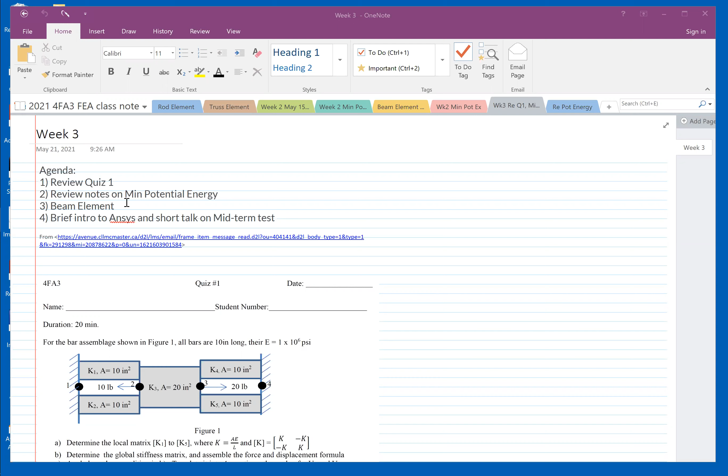Okay, now let's get back to our class. Today's agenda, I have four things I want to talk about. Number one, you guys did well on quiz 1, but I'd like to go through it with you and tell you what I'm looking for when I mark your assignment, quiz, or test. Number two, I want to review, because last week I went through the minimum potential energy notes quickly, so I'd like to briefly go through it one more time. Number three, I'm going to introduce you to a new friend — the beam element, a new element we're going to learn. And number four, I want to briefly introduce you to Ansys, and talk about our plan for the midterm test. That will do.

Okay, now let's work on quiz 1 together. You guys did very well, I marked it, I'm very impressed. The first step, when you see a diagram like this, you may, if you feel comfortable, work on it right away. If not, we draw the whole thing into spring elements.

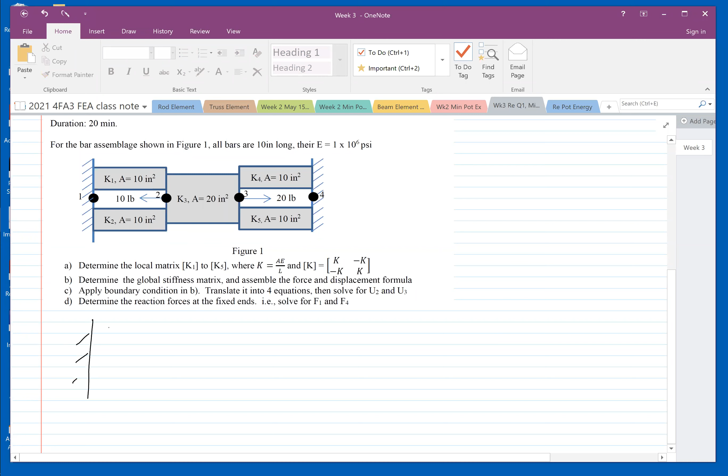Now, and then name them. In this case, there are 5 elements. I am so nice right here — in the quiz, I already labeled the nodes for you, but sometimes I don't do it. It's the first quiz, so it's kind of a given, but usually you have to name your own nodes.

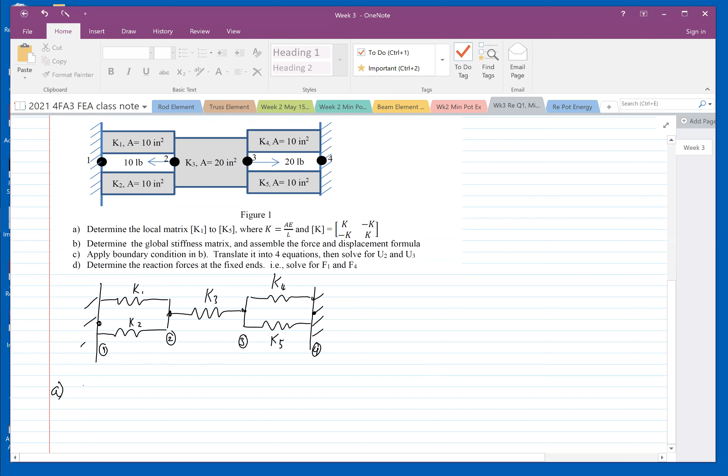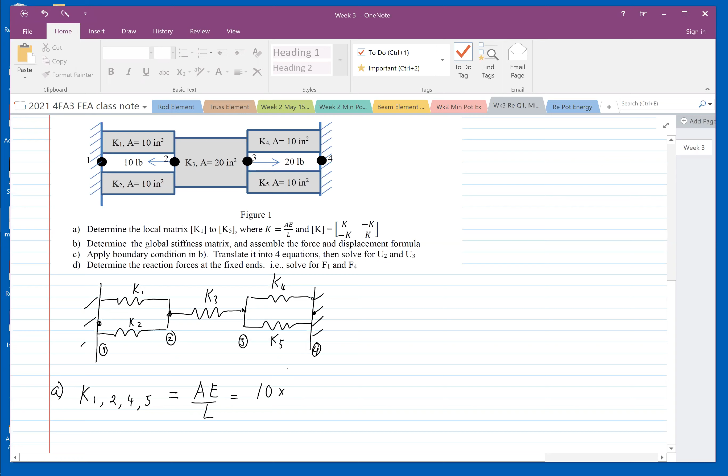Now, let's find the local matrix. In this case, K1, 2, 4, 5 are the same: 1, 2, 4, 5, which is AE over L. 10 inches squared times E — what is E in this case? 1E6. Okay, double check: all units are the same. This is inches squared, this is PSI, perfect, I don't need to convert anything.

Length, which is 10 inches long, so we cross out each other. So K1, 2, 4, 5 is 1E6 times [1, negative 1, negative 1, 1]. That's the local matrix.

If you feel comfortable putting it into the global matrix right away, that's good. But in my question, I asked for the local matrix, so you must specify that. Sometimes I do, sometimes I don't — it depends on the question.

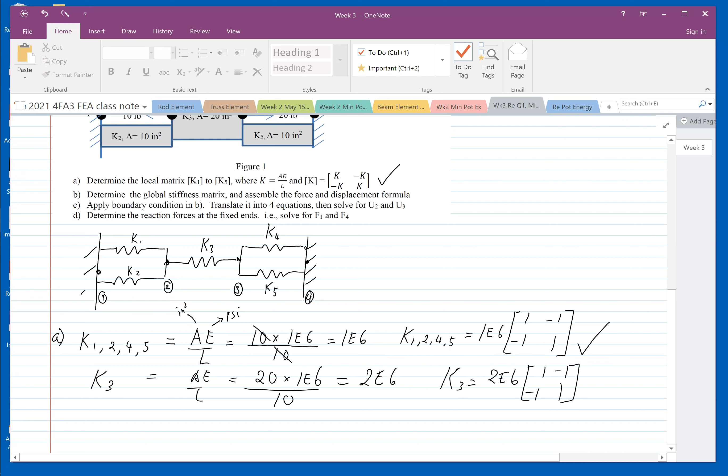For K5, sorry K3 — K3 is AE over L, which is 20 times 1E6 over 10, equals 2E6. K3 is 2E6. By the way, this is how I prefer to write it because it's faster. This is equivalent, up to you how you do it, as long as I understand it and you can present your data, it's all good.

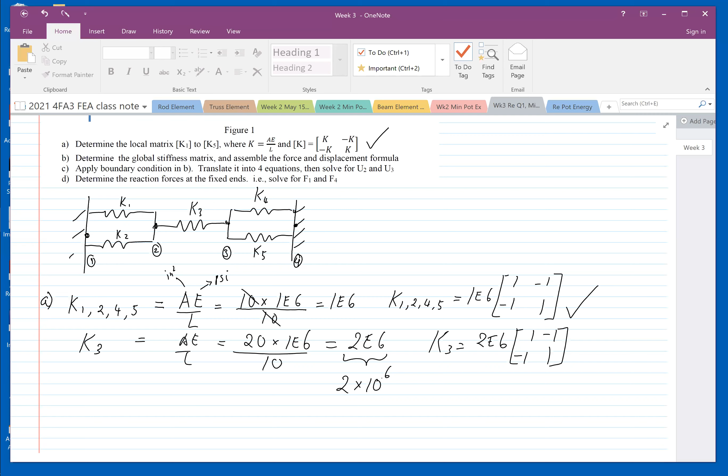The next step, we need to assemble them globally into the global matrix. So whenever they share the same node, whenever they have the same degrees of freedom, you can merge them together.

I like to factor it out. Okay, so I can say 1 times 10 to the 6 right here. Okay, and then this is...

Let's look after K1 and K2 as well. It will be 1 plus 1, minus 1, minus 1, 1 plus 1, minus 1, minus 1. Okay, so this part is done. All right, then look after the second portion of it, which is K3, which is 2.

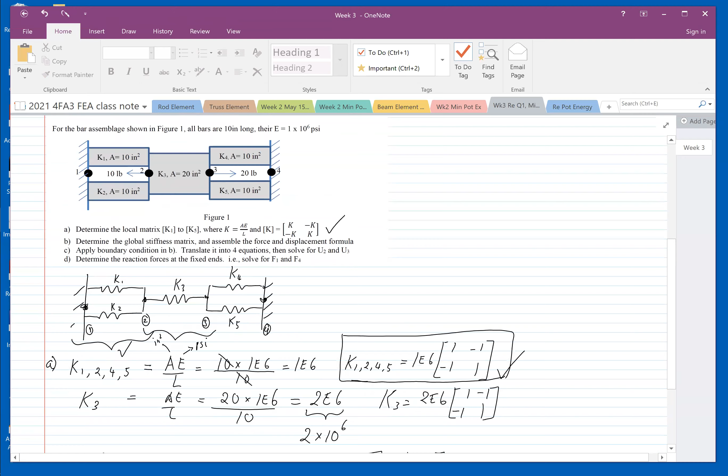On the left side, F2 is 10 pounds to the left. F3 is 20 pounds to the right. Okay, F2 is, because it's to the left, so it's negative 10. F3 is 20.

Okay, if you have that, you already get like 80% of the mark. I count every single step. If you just give me the answer right away, you won't get much. But I count the steps. I want to see how you think, how you process the problem.

The rest of it is very easy. You just multiply this part. What do you get? Okay, you got two equations.

U2 times 4. I think it's 4. Yeah, that's right. Minus 2U3. Did I do it right? I think so, yes.

Back to the comments to one of the students: pay attention to every single detail. Because when you're building something, building a bridge, building cars, if you miscalculate something, you might kill some people.

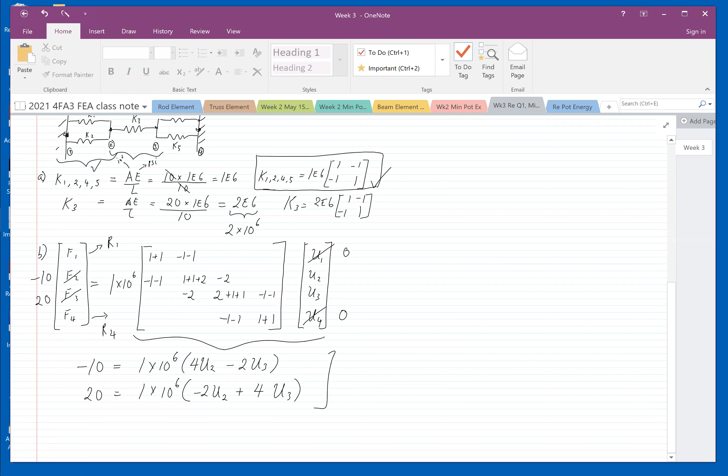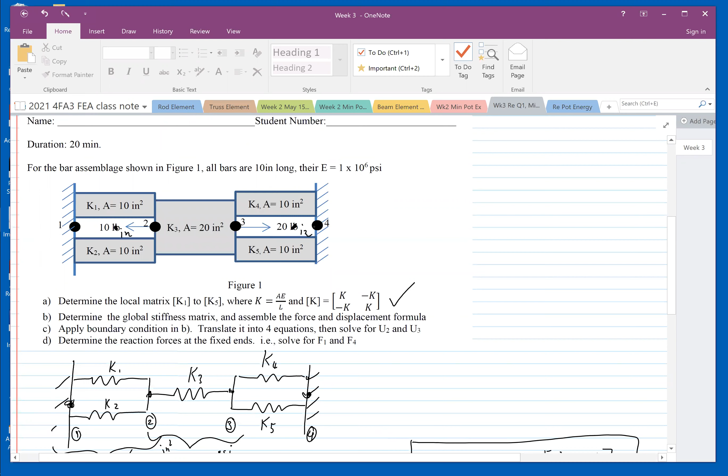Sometimes, instead of 10 pounds, let's say I'm given 10 inch, and right here is 20 inch. Okay, so I do not apply boundary condition on force anymore. I'll be applying negative 10 inch. Is that good? Sometimes you're allowed to do so.

On your left, you always apply boundary condition on forces. On the right, you can apply boundary condition on displacement, inches. Did I answer your question?

Yeah, I would say, but I was just thinking about it, let's say if we go to that spring element diagram, if you move the page up a little bit. Yeah, and so in the examples we did in class, the forces were going all in one direction, so the U's were also going all in one direction. Now, let's say the force 10 pound is going to the left. Does that mean U2 is also going to the left in this case?

Just thinking. I let the equations decide for me. I don't know if U2 is moving left or right yet. I put in the boundary conditions, and I let it decide for me. When U2 is negative, then you move to the left. If it's positive, you move to the right.

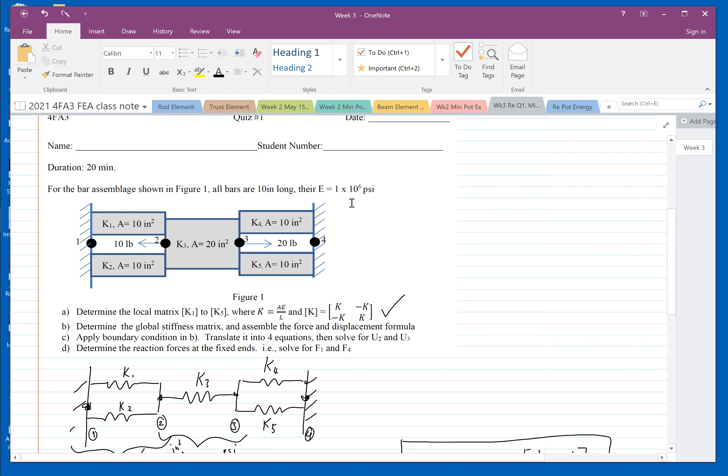All right, it makes sense. Okay. Okay. Yeah.

Okay, I'd like to quickly go through the minimum potential energy approach lecture again. Won't be long.

So we start with a 1D element. It has two nodes: node 1 and node 2.

What's going on with the node? Each node, you're allowed to apply a force to it, along one dimension. You can move in both directions along that one dimension, left or right.

Same here on node 2. You have a force, and you're allowed to move as well.

So this element, each node has 1 degree of freedom because it can move left or right. But the element has 2 degrees of freedom, DOF.

I know what's going on at the node, but what is going on in between? I need a shape function to decide for me. So I put everything in terms of u as a function of x. x can range from 0 to L.

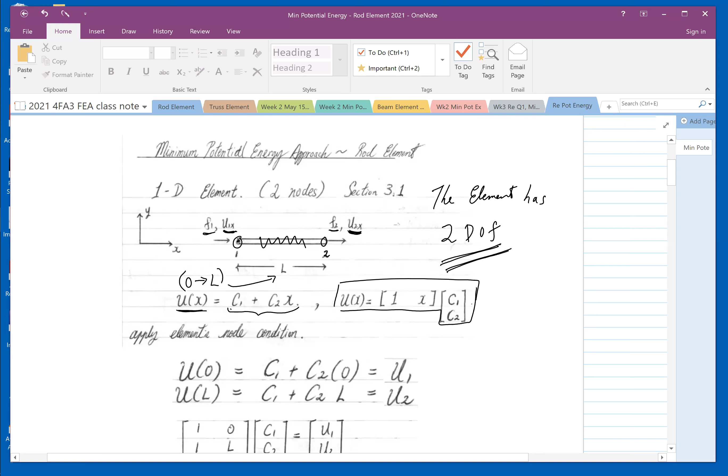So far, I just assume 2 constants. Now I apply the node condition. When x is 0, I know it's moving U1, because this is something that I know. I know node 1 is moving U1, node 2 is moving U2. So I apply that: C1 plus C2 times 0 equals U1.

And then when x is L, I know it's moving U2. So again, I apply the same thing here. We get U2.

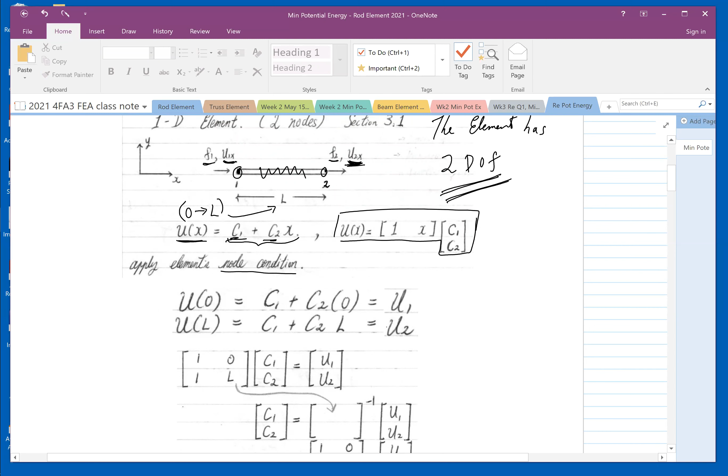Factor out C1 - that's something we're looking for. Then I inverse the whole matrix, the whole mess, and I get this.

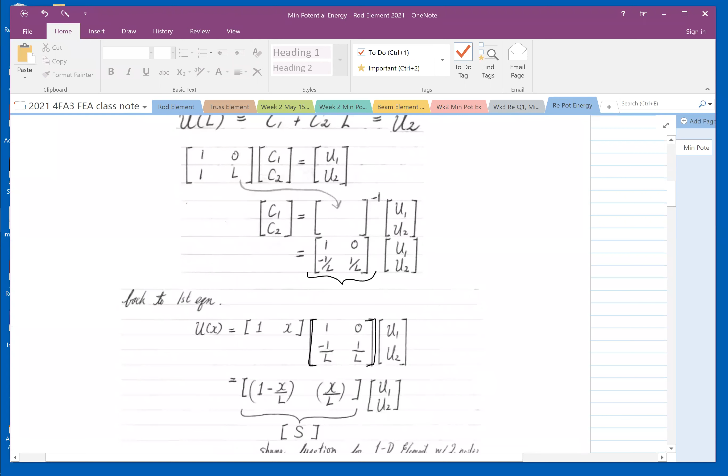Basically, this is the shape function, which is 1 and x times... this is C1, C2.

All right, put this aside. We want to study the elastic behavior within the elements - the work done to deform under force. The work done within an element is force times the total displacement.

But right here, my intention is to put everything in terms of the strain. I start with the work done, and then I take the integration of it, putting everything in terms of strain energy.

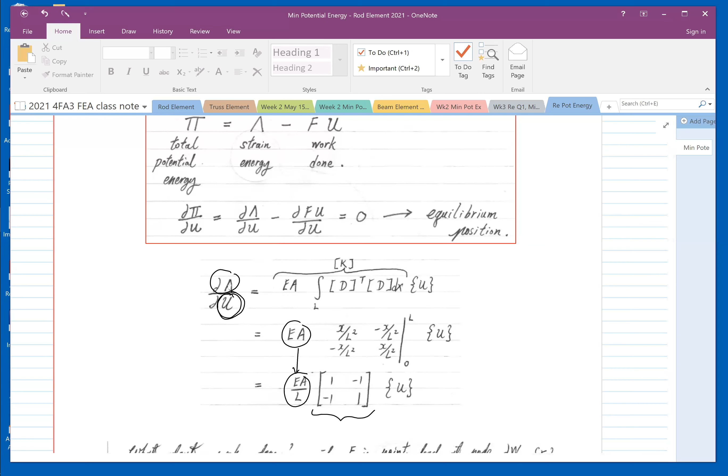It is not easy to understand all the steps and details, because seriously, a project like this is worth like a PhD degree. It takes many years to develop, but we are the lucky ones - someone developed it for us, we just use it.

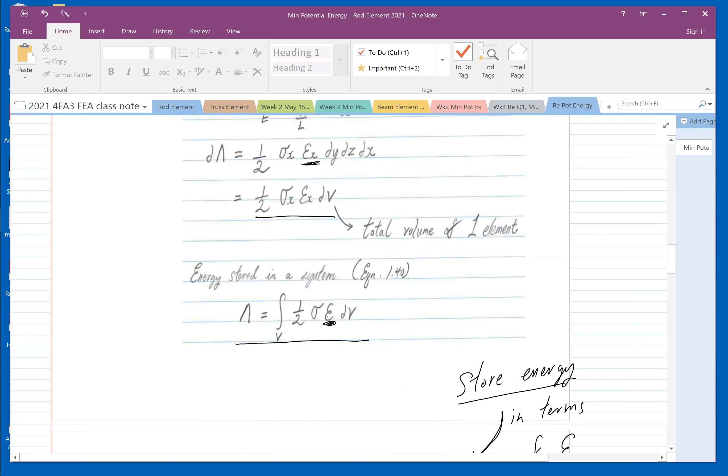But the major concept is like this: you start with elements, you develop that into a shape function. From the behavior and the energy equations, you put everything in terms of strain. And with the strain, you develop a strain and displacement relationship, the matrix.

You put it into the equations, you take the derivative of this, and factor out EA over L. You get the stiffness matrix of the elements.

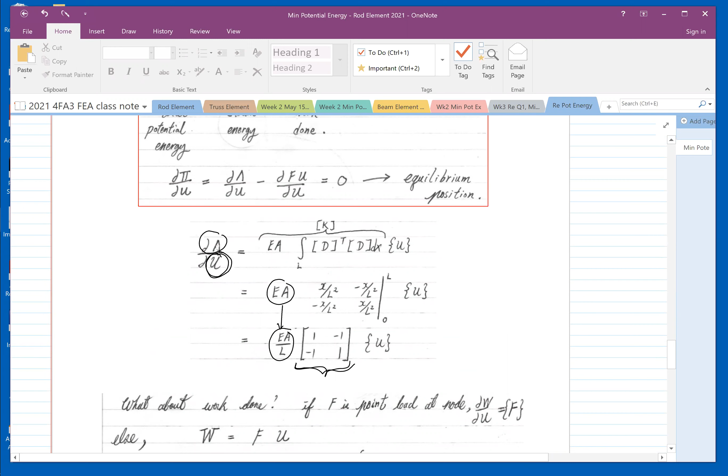And the work done on that assembly can be calculated by integrating Fx and Ux. Okay, because Ux is a variable, right?

And then the shape function of that - which is the shape function. The variable, okay, sorry, the variable u is the shape function times the u vector that you know.

Oh, by the way, I think I said something wrong. I previously said u is not a constant. It is a constant - it is u1 and u2.

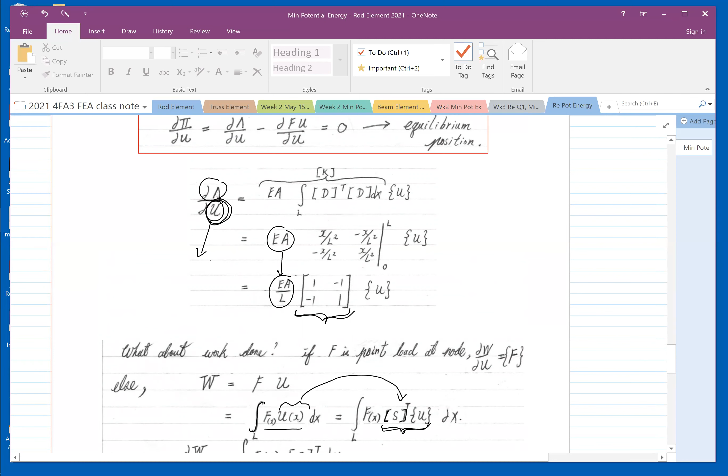Known values that we define in the first step: how much they move, u1 and u2. Anything along the axis is variable, but u1 and u2 alone is something that we know.

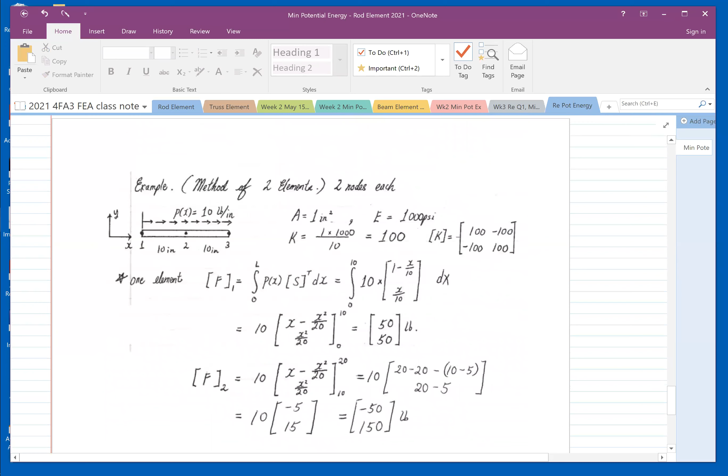And from the examples, we don't need to develop the stiffness matrix anymore, we just use it. We know the stiffness matrix is k, negative k, negative k. But we only have to define the force, which is the applied force, 10 pounds per inch, times the shape function.

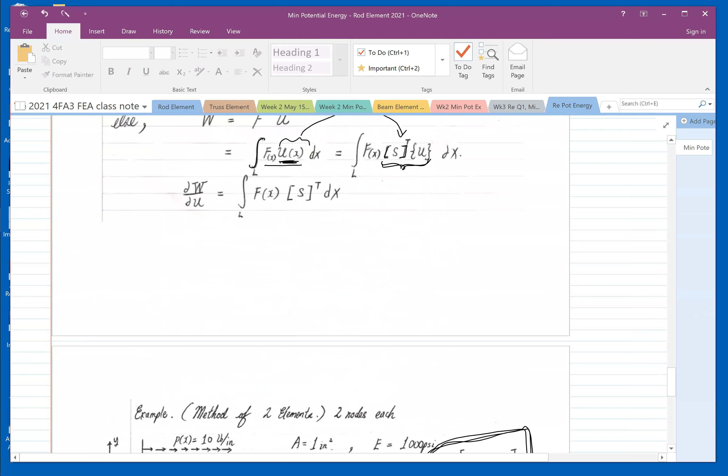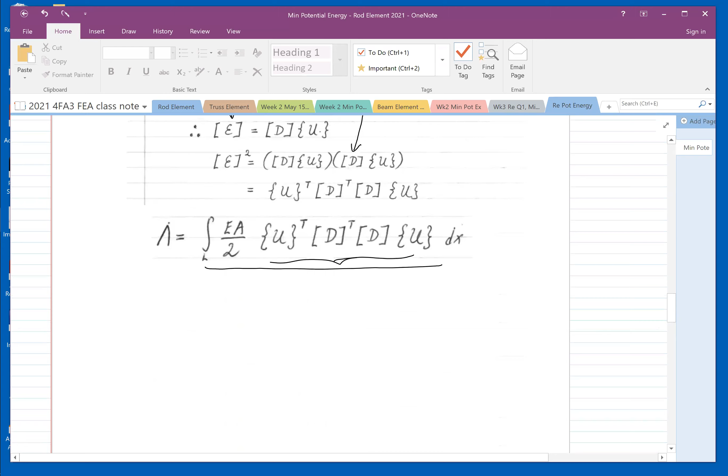And the shape function of the elements we know, we learned it previously. Each element has this unique type of shape function. For that shape function, you can only use it in a 1D with 2 node elements. Do not use this shape function for some other elements, you cannot. Each element has this unique shape function signature.

So it is a 1D with 2 node elements. So we use the shape function and take the equation of that. We get the force on the 2 nodal points. For F2, this is the second portion of it. And then we take the shape function of it and integrate that. We get another force. We put those 2 forces together.

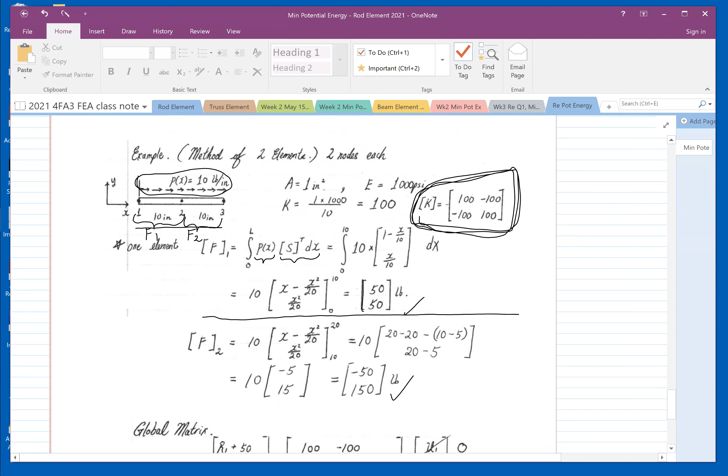So F1 and F2, are they work done? They are, F1 is the local force matrix, let's call that local force matrix. F2, that applied force is gonna do something to the elements, right? The applied force is doing something along the elements, but what are they? With this expression, we can calculate what this force is doing to the elements on both nodes.

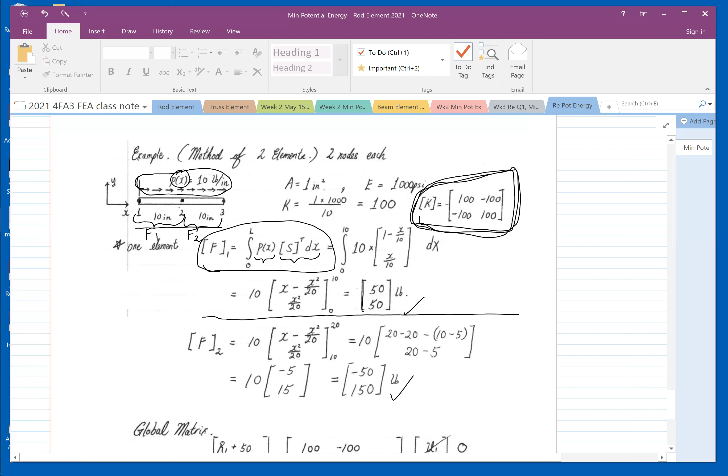So this is the local, what happened locally in a matrix, right? Locally on each element. When we combine them together, we get this.

And then we apply the boundary conditions. We get U2, U3, and then the reaction force along the wall.

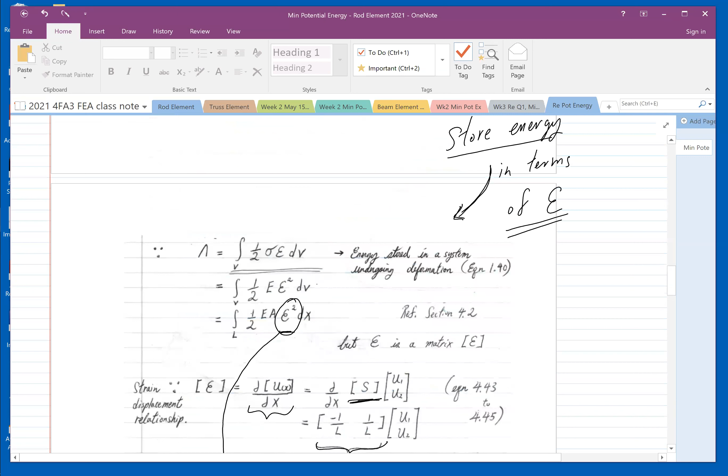Always. For more complex ones, it's going to be different though, right? The more complex one is the strain displacement matrix, is that right? In this case we don't need it, because I already know how to calculate the stiffness matrix for the spring element. I don't need to go through the spring elements matrix and calculate the energy again because I know the spring elements matrix will be like this, right? So I don't need to calculate it one more time.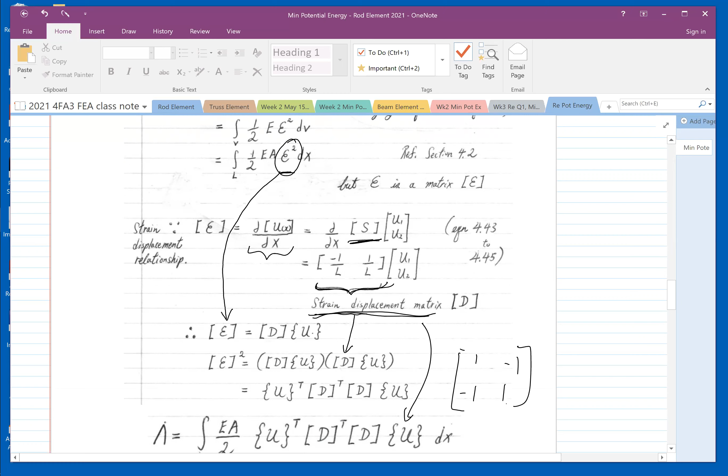So I just use the shape function, which is 1 minus x over L, the shape function. So this is for two nodes, right? So if we have three, if we're gonna do a shape function for 3 nodes, it's gonna be different, right?

Very different, very different, okay. But like you showed here, we don't need to do it for a complete 3, right? We can divide it into 2 and then combine it. It's a lot easier, isn't it? Yeah, right, yeah yeah, I know.

Did I show you examples? Yeah, I saw that in a textbook. You assume ux and then what, c1 plus c2x plus c3x squared, something like that, right? I saw that in a textbook, but I don't want to use that, this just takes way too long. Well, if I have an element with 3 nodes, why not join 2 elements with 2 nodes in it?

So it works with any number of elements, right? Say we have another point at 0.4 also, so we can divide it into 3 different elements with 2 nodes. Yes, you can do that. Yeah, okay. With only one condition though, they must have a common degrees of freedom. You understand what I mean by that?

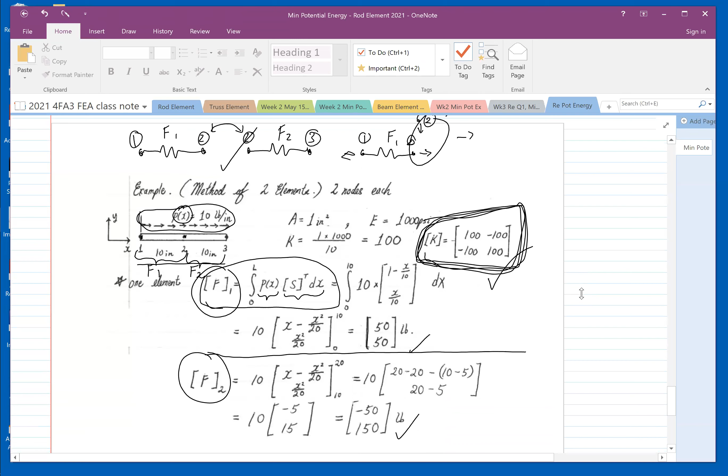Let's work on a new element. Sorry sir, I have a quick question about the global matrix, where you develop 50 plus R and 50 minus 50. Can you explain how you get that? Oh, no problem, let me show you with the example.

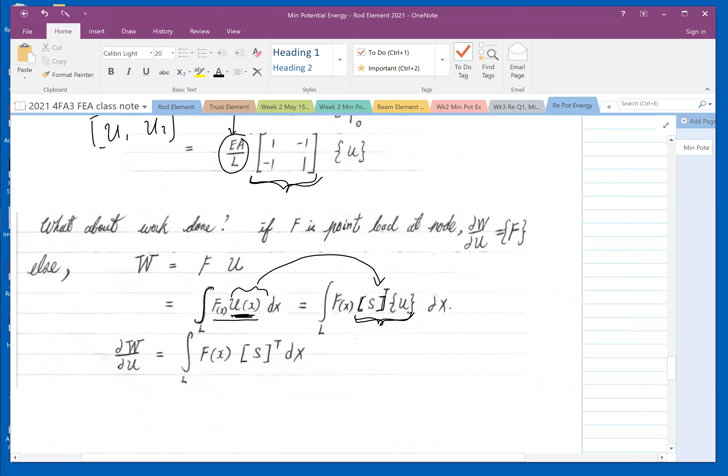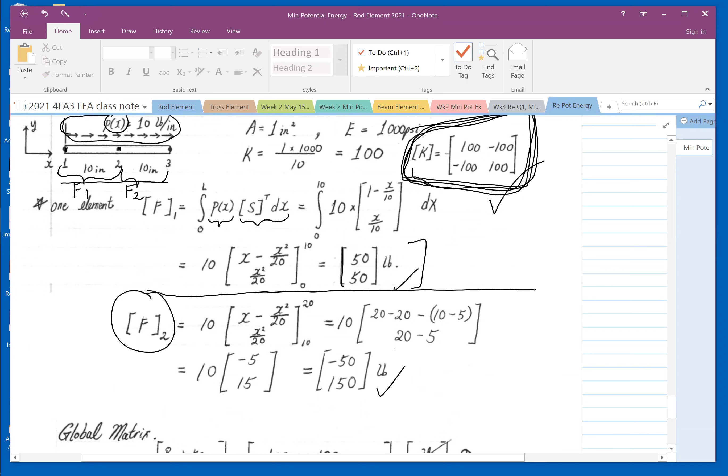You talk about the force matrix, right? Do you have a problem? Do you understand the integration? Yes. You have the integrations, right? And do you understand this part? Yeah. Then that's very easy, I'll show you.

Okay, is that good? Can I move on? Yes, thank you sir. No problem.

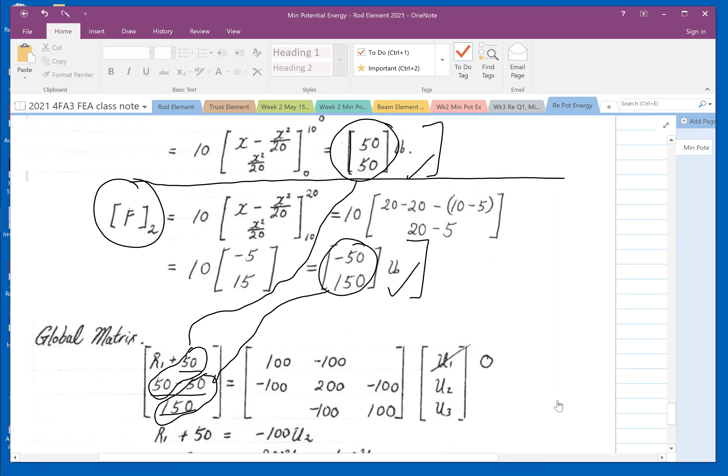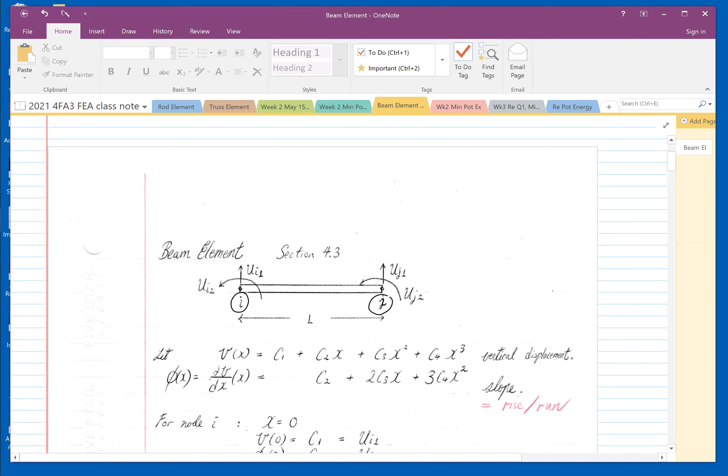Okay, today I'd like to introduce a new element to you. That element also has two nodes, node I and node J. However, it behaves something very different. Each node, they can move up and down, and also it can turn.

It's allowed to turn. So that's why the element has 4 degrees of freedom, it has 4 ways to move. So because it has 4 degrees of freedom, we introduce 4 terms to it.

C1, 2, 3, 4. To define how much it turns, we can specify the degrees, the radian, but there's another way to do it.

We define the slope by using the rise over run. So we take, if the deflection perpendicular to the beam is small enough, we can take a derivative of that previous term. So you get this, this is the term with the slope.

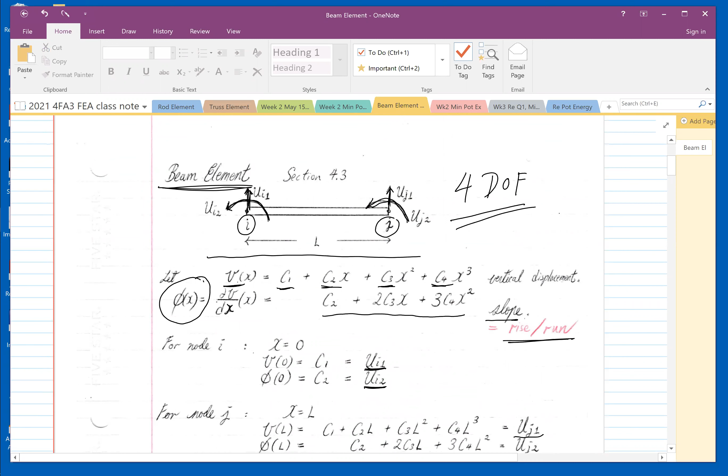Yeah, it's a V. The actual displacement is U. Hey, good comments though, maybe I should change that in the future. Okay, in this case, the function is V, the actual displacement is U. Good feedback, I might change that in the future. But in the meantime, let's assume the function is V. The actual information we know, UI1 and UI2, UJ1 and UJ2, is U.

One more question: does that small v represent the velocity? No, it's not. The displacement, the actual displacement, only the displacement on the node.

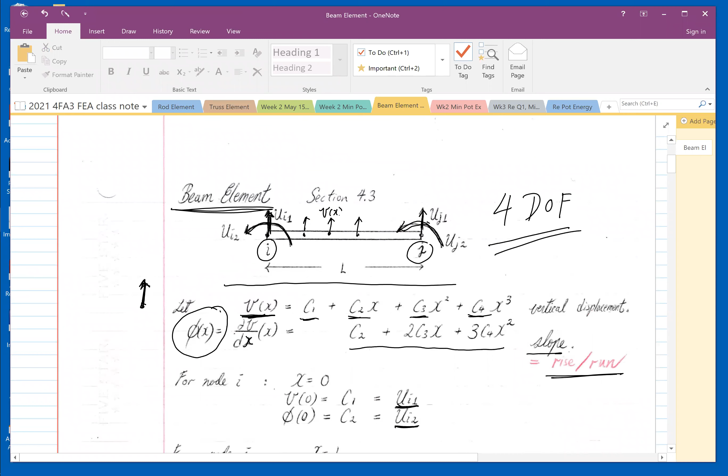What it does is we know what's going on in the node. But what about something in between? That's the V function - how much they move along the L. X is from 0 to L.

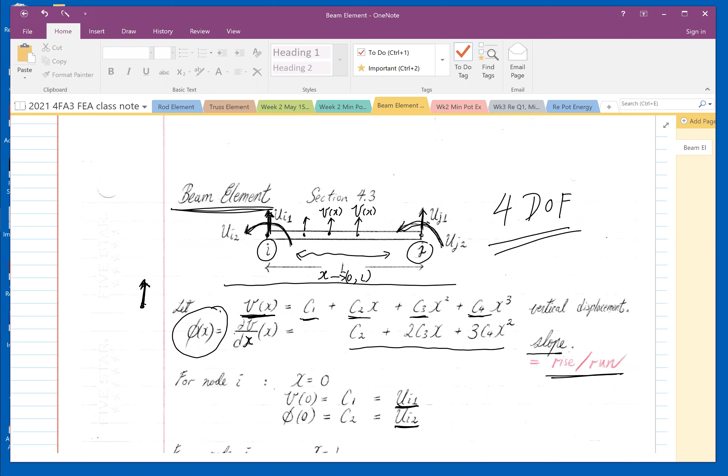Questions, comments? All good? Okay, I'm going to move on now.

Now, for node I, X is 0. So we put all the X to 0 and you got C1 and C2. So right here, we know UI1 will be C1 and UI2 will be C2.

For this example, why do you choose to use 4 C constants? Why is 4 the magic number here? 4 degrees of freedom? Is that what we're looking at? Exactly, 4 degrees of freedom, 4 terms.

Previously, the spring element has 2 degrees of freedom, so C1 plus C2 X - 2 terms. Very good question, very good feedback. I like that. 2 degrees of freedom, 2 terms; 4 degrees of freedom, 4 terms.

Just want to let you know, in the future you can learn 2D elements, which have 6 degrees of freedom, and guess what, 6 terms. That lecture is a mess, but you must understand what we have so far. We must understand spring elements, we know beam elements, then I'll introduce more complicated elements to you in the future.

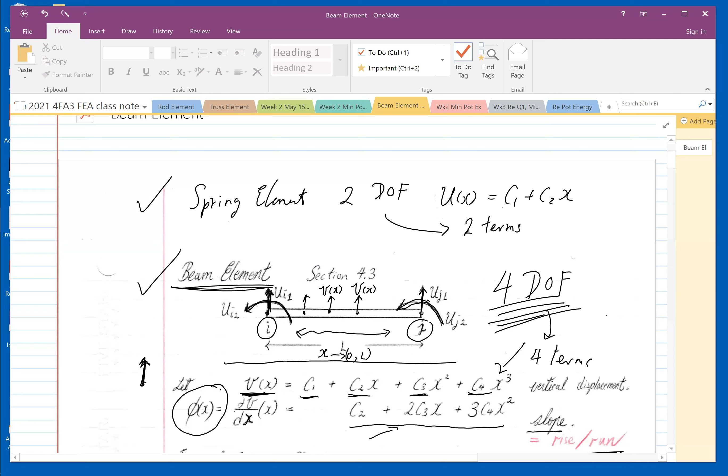Okay, let's move on.

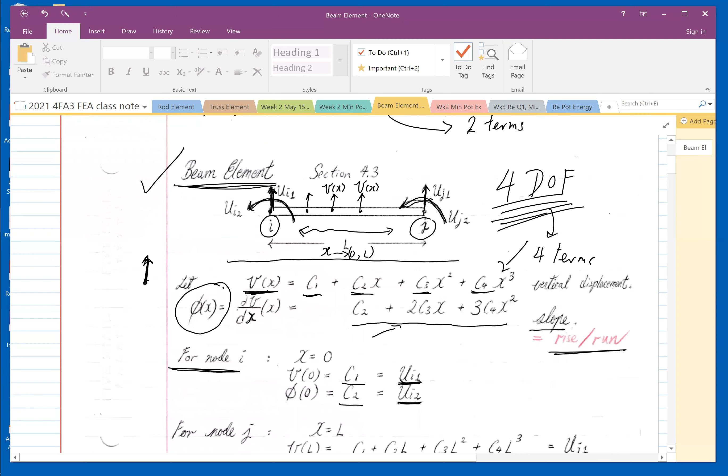Okay, for node I, X is 0. For node J, X is L. So we substitute X equal to L into these equations. And when X is L, we know UJ - at the end of it is UJ1, and the slope is UJ2.

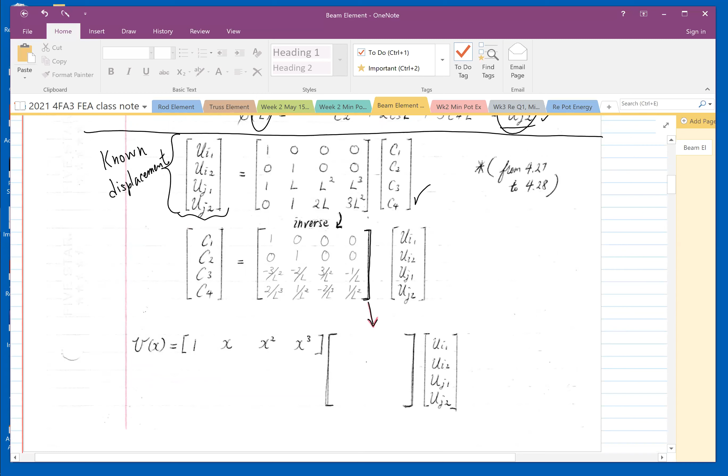We take the inverse of that, which takes me so long, but I did that for you. We put that inverse matrix here, and we multiply that together.

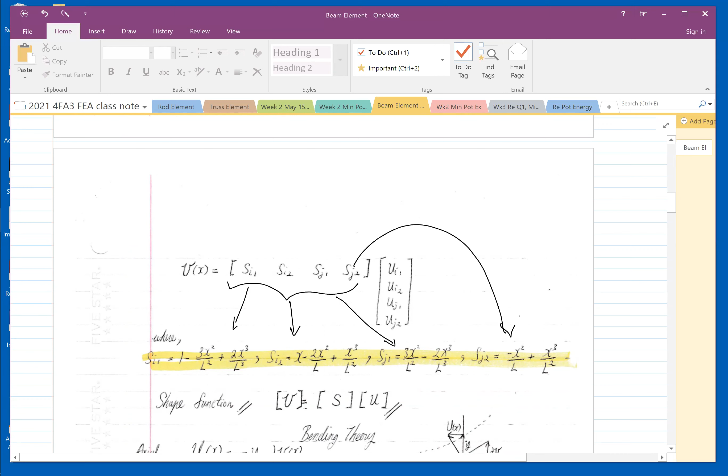Multiplied it together, we get the 4 shape function terms. This shape function term is so long, so I write it separately: SI1, SI2, SJ1, and SJ2. Remember, this is the unique shape function for beam elements only - this shape function will not work in other elements, only for beam elements.

Okay, let's move on.

Bending theory - let's talk about bending theory right here. When this is a beam, when you bend it a bit, there will be small changes to this axial length. That makes sense, right? Because this is the original shape, when you bend the beam, it's a bit shorter, right?

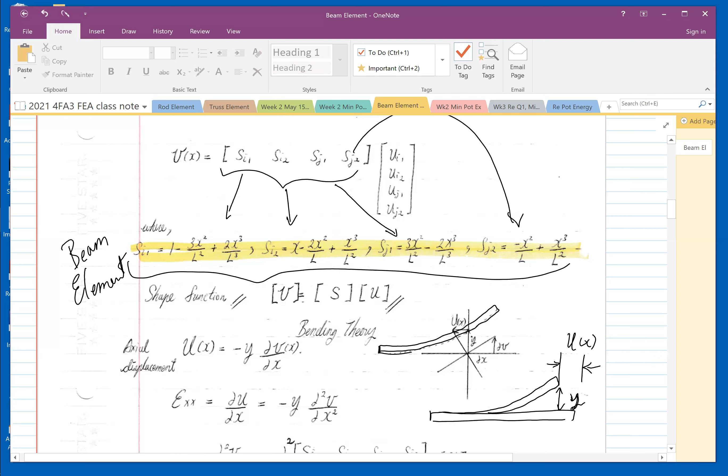So let's define that by Ux. And from the bending theory, depends on how much you bend by Y. And then you can develop that bending theory, so we have that dV function.

Again, the main thing right here - why did I do this? What's wrong with me? I was writing the shape function, and all of a sudden I talk about bending theory. Because I want this term, the strain energy - strain is so important in terms of energy. We move it, we move by a certain length, and then the energy will be stored in between. And that's why we need this term, the strain, which is du over dx, the total length, dx. We take the derivative of that, and when we apply bending theory, we put this term and take the derivative one more time.

Since previously we have a function for v, we simply take the shape function and take the derivative of it twice, two times.

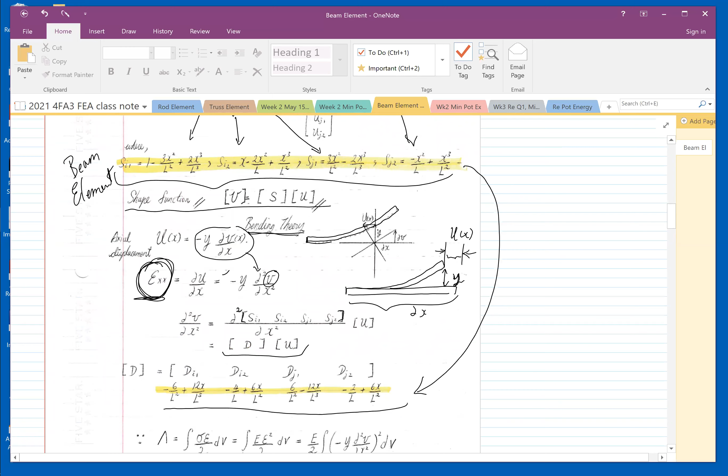The shape function we have, we'll take the derivative twice. Okay, we get 4 terms. Same recipe: we use the strain energy stored within the elements. Can we substitute? See the key components right here, it's strain. Okay.

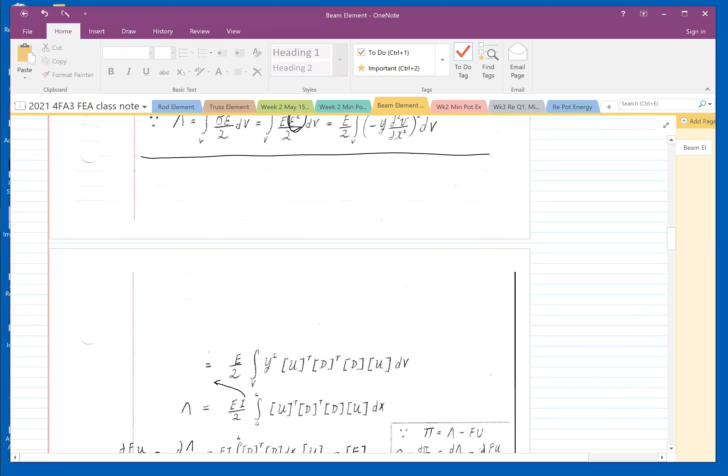We know E. I is the moment of inertia. Again, it's given, it's constant, it doesn't change along the beam. And we factor out this term.

This is going to be the stiffness matrix for a beam element. By the way, D is a 1x4 vector. For D transpose times D, you will get a 4x4 matrix.

It's so long we have to repeat that. Let's do one entry. This is the first term from the D vector right here. Okay, that's the first term. This times this together, we take the integration of that, apply the boundary condition from L to 0, we get 12 over L cubed.

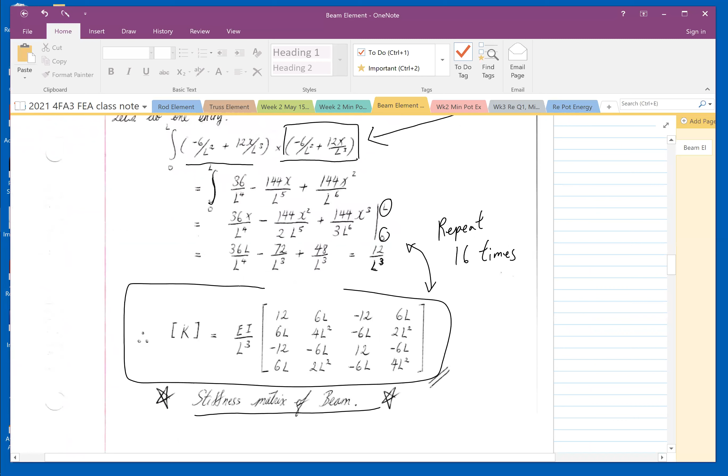The condition is this matrix only works for one beam, okay, with two nodes. It moves up and down, doesn't move... the elements, the nodes move up and down. It doesn't move left or right, okay, it cannot do that. Only up and down, and it turns.

Just to recap, this is a 4 degrees of freedom beam element. Okay, this is the stiffness matrix for the beam elements.

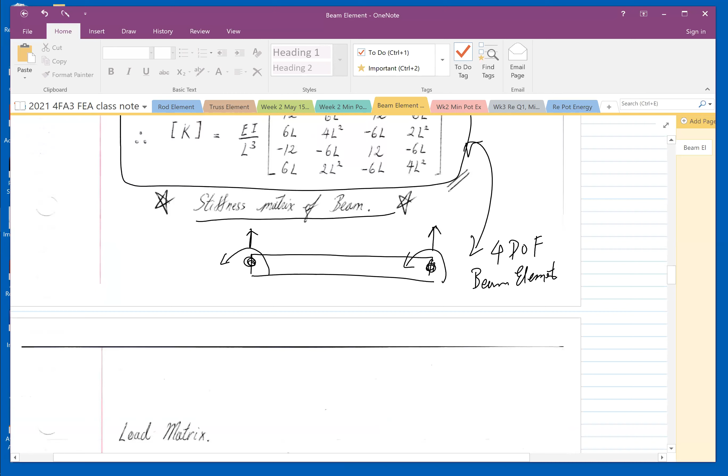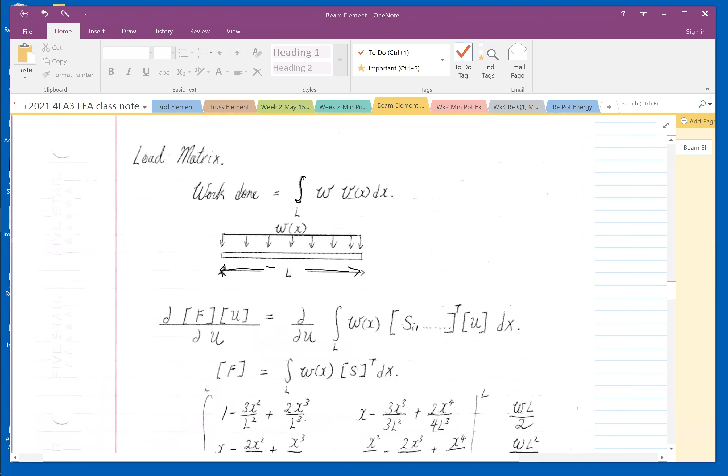But what about the loading vector? Let's say work is being done on the beam elements. Okay, we apply the same recipe, dF over U. We had that in the previous lecture. Okay, the work done, this is the shape function, and this is U that we know.

Known displacement. We have the shape function, we transpose it, and then we take the integration of that. Finally, we apply this from L to 0, and we get 4 terms.

Okay, this is the uniform load applied on the beam.

So for all the talk I had, we developed the stiffness matrix for the beam elements and the loading vector, when there's a uniform load on top of the beam.

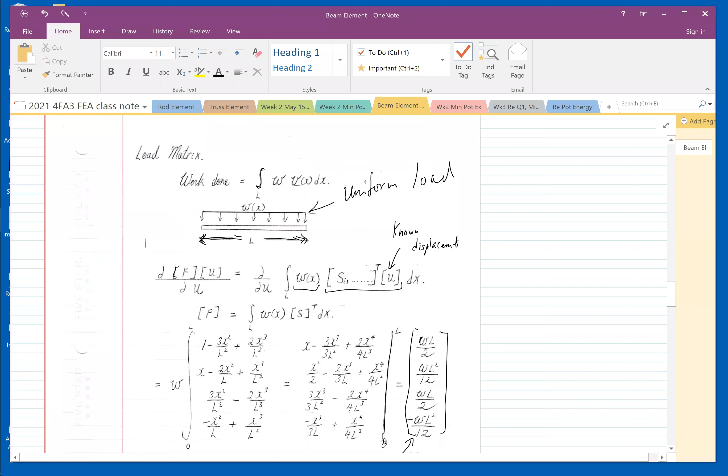I know you're confused, don't worry. Let's work on an example, you will feel better.

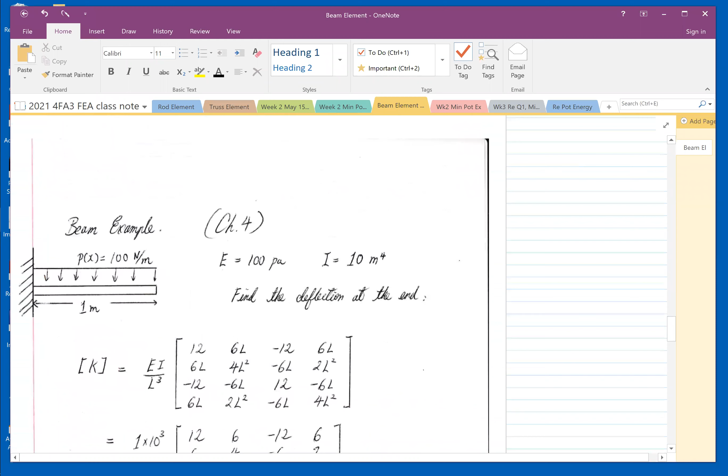I have a beam, okay, which is attached to the wall. It has a certain length, and there's a uniform load applied to it, 100 Newtons per meter. Okay, we have the constant elasticity, and also it has inertia. So find the deflection at the end of it.

This equation, this matrix, is given. Do not develop it for me in an exam or test unless I ask you to. But usually you just have to know, you must know how to use it. Do not develop it, okay.

And we know L is 1 meter, EI is 100 times 10. By the way, make sure they have common units. Pascal is Newton per meter squared, which is good, okay, common unit.

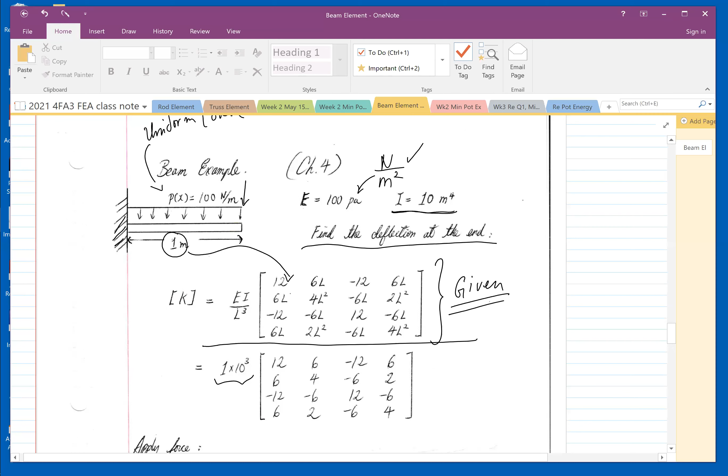Sub in the L, we get this term. Okay, that's the stiffness matrix, the K matrix. Apply force, that comes interesting.

These things are already given, okay, you just times that by 100. Oh, by the way, the integrations are already given there.

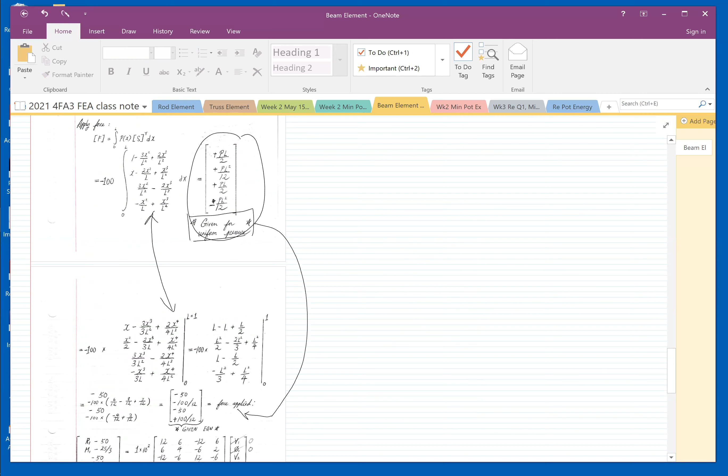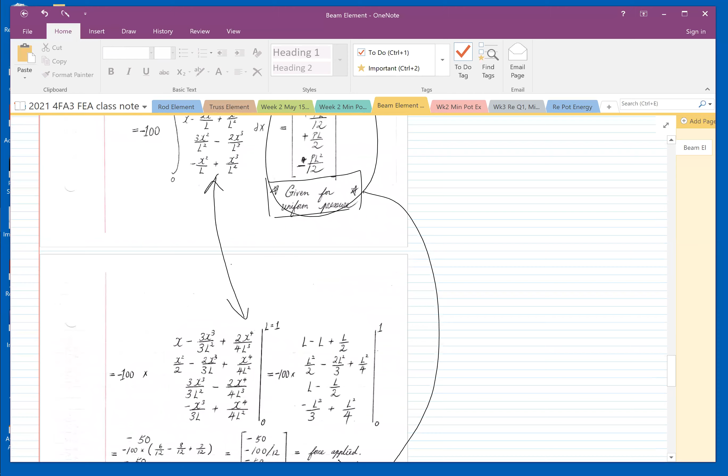Yeah, right here, it's the given equations. In the test, you don't have to do this, it's already given. I just repeat the integration again to show you how I got it. You can study it, but you don't have to do it.

Okay, because P right here, pressure is negative 100. What is the L? It's times 1 meter divided by 2. Right here is, again, P is negative 100 times L squared divided by 12. The first term is negative 50. The second term is negative 100 by 12. See, that's what I got.

It is a given equation, so let's use it, right? So we put these 4 terms right here, and then we have the stiffness matrix. We know the 4 terms, 4 degrees of freedom, which is V1, phi 1, V2, phi 2. It's locked against the wall on node 1.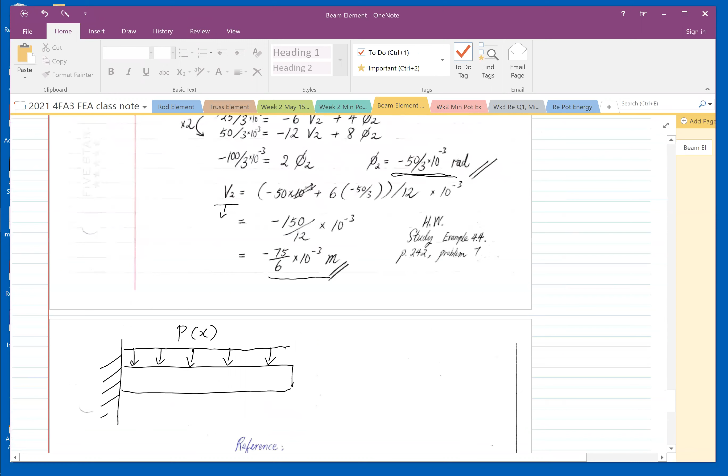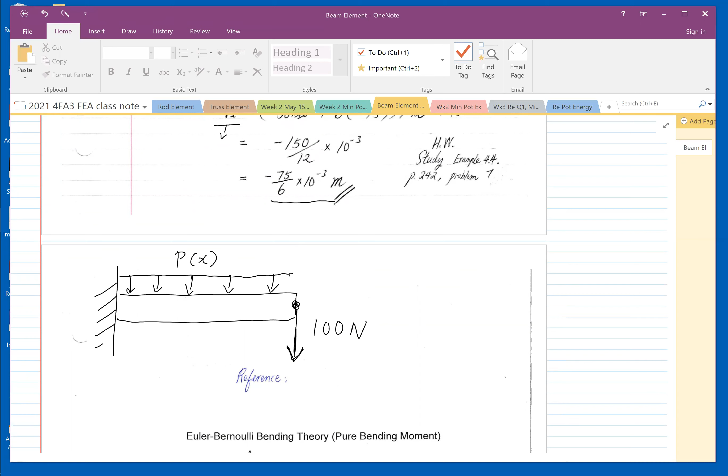We want to calculate deflection. What if I'm adding one more node, one more load to it? How do I handle that? If I have an additional load to it, 100 newtons, guess what? I move back to the equations right here.

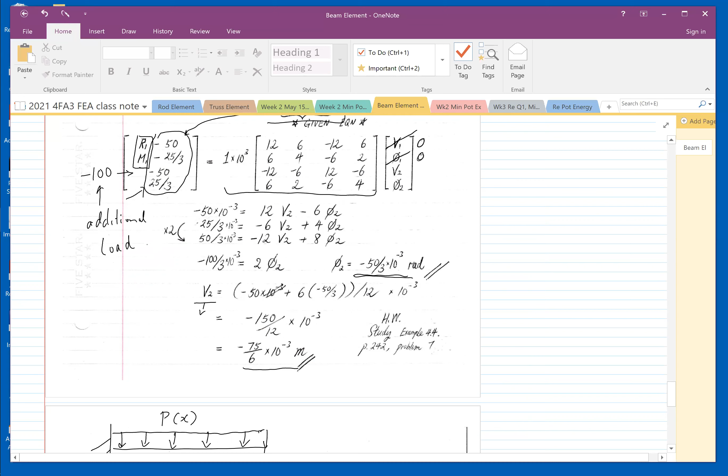That's the additional load we have. Please add it to the third term. Do not add it here, unless I say moments. Then you have to do something right here as well. Get it?

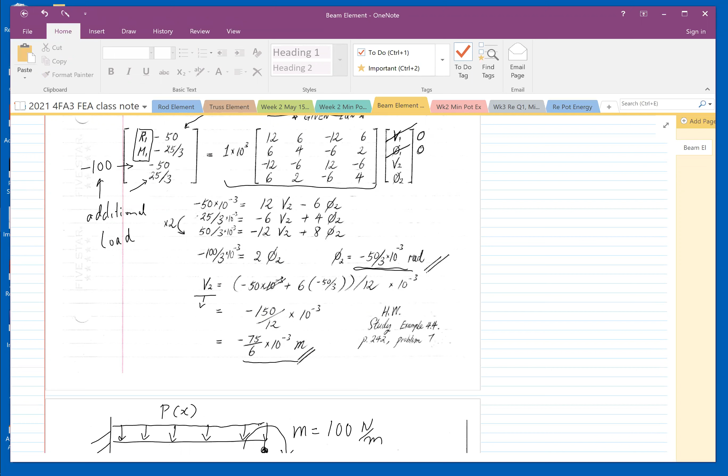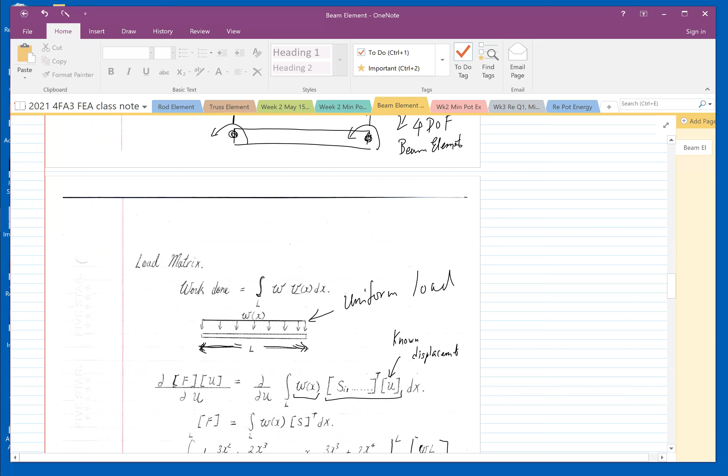That's it for the beam elements. I know it's tricky to understand everything. Try to review the notes and you will have a better feeling of it. Review the examples, review the example of it.

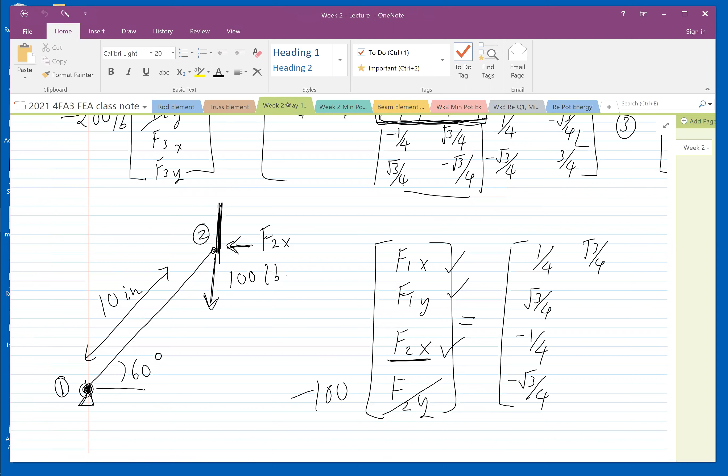I am writing, I'm designing your midterm exam right now, okay? Your midterm exam will be based on the rod elements, spring elements, the truss elements of it, minimum potential energy.

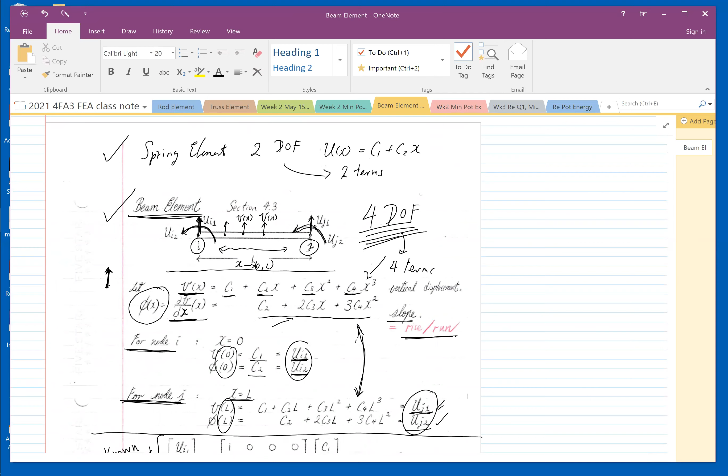Yeah, that's right, this one. And also the beam element. Very likely, I might ask you to join them together. What I mean is when you have a spring element, you have no issues joining the two spring elements together, right? And as long as they have the common degrees of freedom, you can join them together to the truss element.